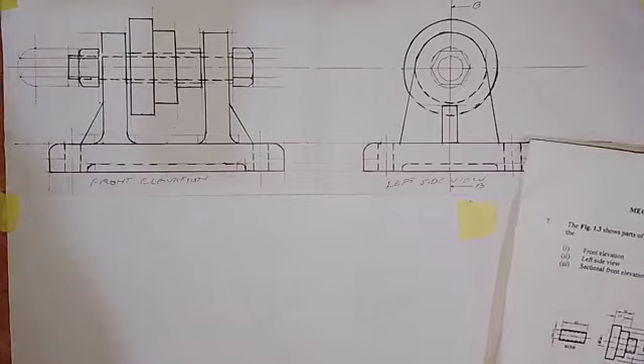Now we are going to continue working on this mechanical drawing, which is the 2026 NECO exam question. We have answered Roman figure 1, which asked us to draw the front elevation of the assembled parts, and we have also made the drawing of the left side view.

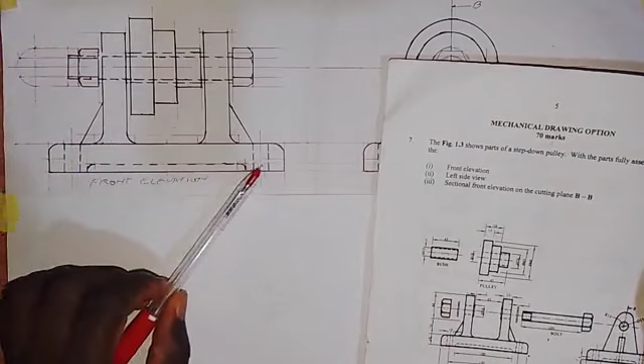Now we want to work on the sectional front elevation on cutting plane BB. I've placed the cutting plane as we can see it here on the end elevation. So when this part is cut into two, we remove this part and want to see what we have here. To draw the sectional front elevation, we replicate this, but in this case all the hidden parts will now be exposed. That is what we want to do right now.

Let's see how the construction can be made for the sectional front elevation as instructed. First we are to draw a horizontal center line. So here we have a horizontal center line like this.

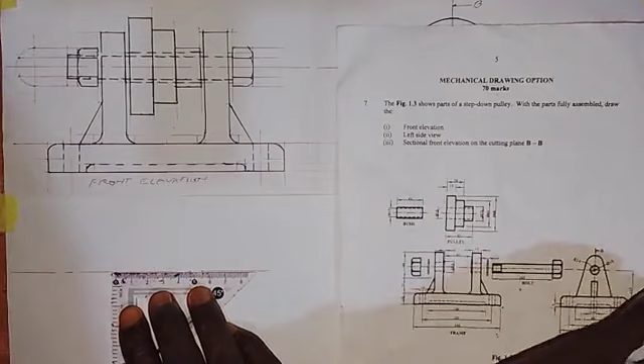Then we are going to start with the pulley. As we did for the pulley on the front elevation of the assembled part, we take the measurements. Total length is 45, but we add from here to here 15, from here to here 29, and then we have the balance here.

I will take the measurement. Normally I'm supposed to transfer from here, but I want us to have it taken accurately. So this is 15, then we have 29, and then we have 45. At each of these points we are to draw a vertical line.

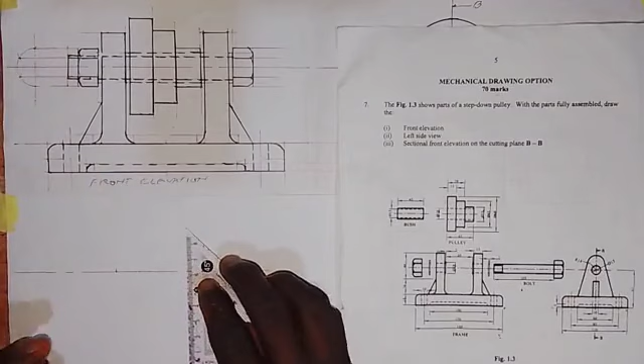Here we have a vertical line like this, and then here we also have a vertical line at this point. At this point we also have a vertical line, and then at this point we have a vertical line drawn here like this.

Let's take the diameter of each of them. Diameter of this is 60, this is 45, and this is 25. So 25 by 2 gives us 12.5, so here we have this to be 12.5 down and 12.5 millimeters up. Next one we have 45, so 45 by 2 gives us 22.5, down and up. The third one is 60 in diameter, so 30 millimeters down and 30 millimeters up, making 60.

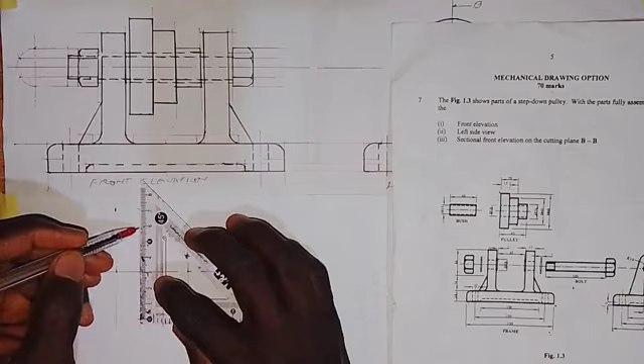At this point we are to draw a horizontal line. So here we have a horizontal line from here to here, and then coming up, we also have a horizontal line from here to here. Coming up, we have a horizontal line at this point, and then up here we have a horizontal line like this.

So then the next thing we are to do is insert this bush inside the pulley, because that will also be exposed by the time we cut it with the cutting plane.

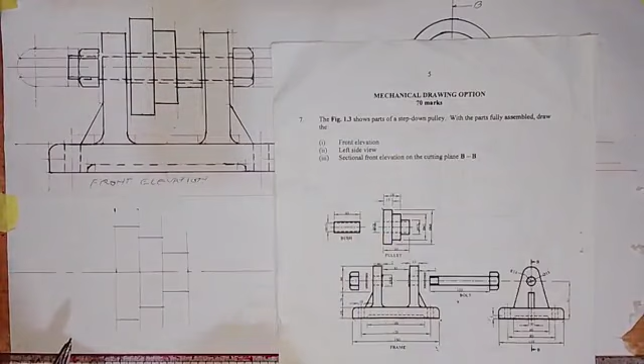So the diameter of the bush is 19 millimeters. 19 by 2 gives us 9.5 millimeters. So here we take 9.5 millimeters down, and up here we also have 9.5 millimeters up.

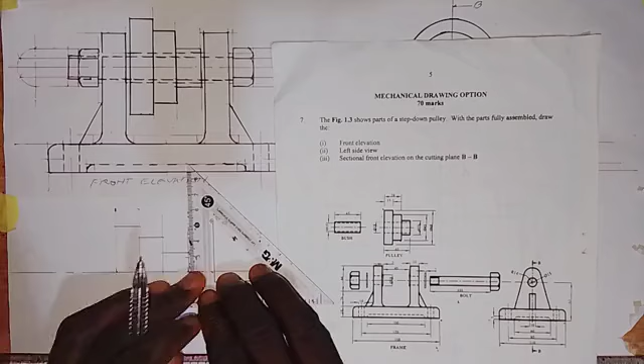Then we have a hole inside the bush with a diameter of 15 millimeters. 15 by 2 gives us 7.5 millimeters. So here this is 7.5 millimeters down, and up here this is 7.5 millimeters up.

This line will be seen clearly, so we are going to have it as a complete solid line. This also needs to be exposed; this is the thickness of the inner part of the bush, so we also need to make that line a thick solid line. Then coming up here, we also make this line a complete solid line.

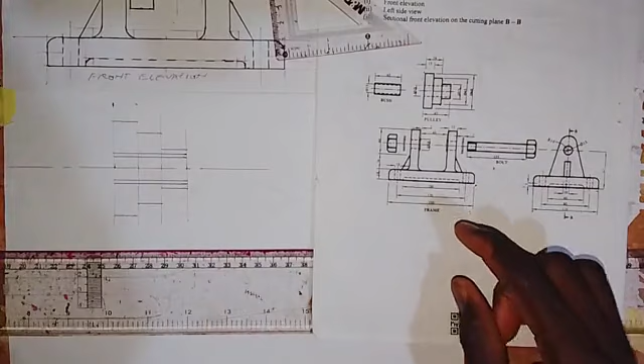All right, so now let's work on this part of the frame.

So we have a washer here, which will also be exposed on this face. It has the same diameter as the bush, which is 19 millimeters. Let's work on that, and the length from here to here, the thickness is 2 millimeters.

So let's work on that, we take the measurement directly and measure it. We take 2 millimeters, so this is 2 millimeters, and then on this side we also take 2 millimeters. Here is 2 millimeters here.

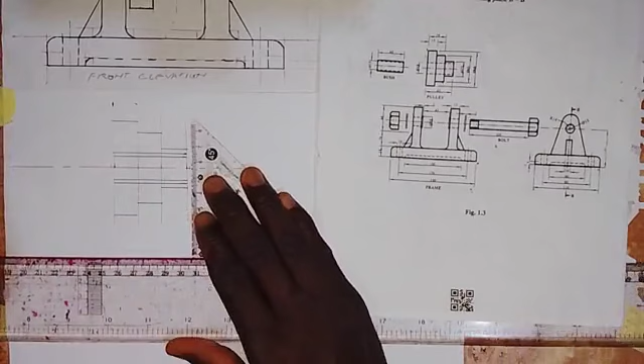So then we are to draw a vertical line at this point. Here we have a vertical line here like this. On this side also we have a vertical line here, like this.

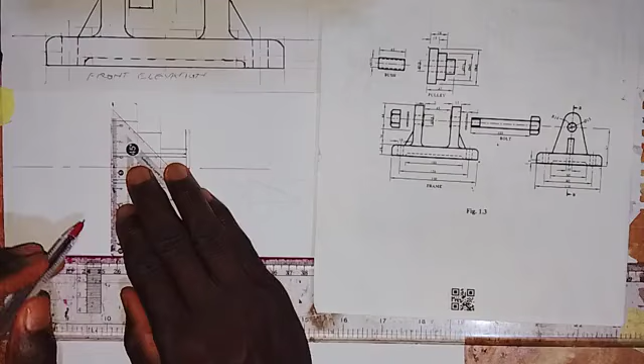So then that 19, we just transfer it here. So this is it. Then that 15, which is 7.5, we transfer it because that will also be exposed. We're supposed to do it on both sides, so we also draw from here to here, and then here we also draw.

So then coming up here, we'll do the same thing by extending this line to this side, and then up here we'll do the same thing, extend it here, and then extend it to this side. So we have this now.

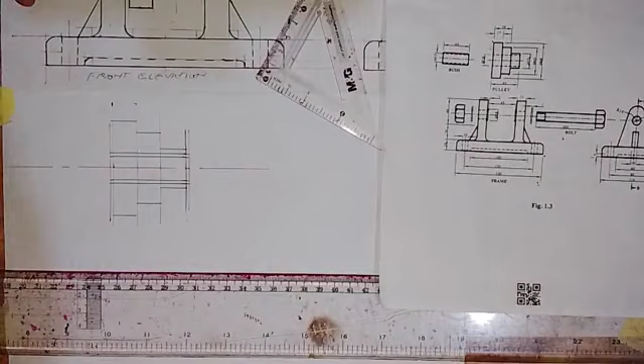All right, so having done this, the next thing we are to do is locate this upper part of the frame. So let's locate it here.

So from the center, it is 22 up, because total from here to here is 44. So that means from the center up is 22 millimeters. We take a measurement of 22 millimeters from here, so this is 22 millimeters up.

So we just have to extend it, we draw this line to the left side, and we draw to the right side from here.

So the thickness of this part of the frame from here to here is 15 millimeters. We take a measurement of 15 millimeters from here to this side, this is 15 millimeters on this side also. So from this line, we take 15 millimeters to the left side.

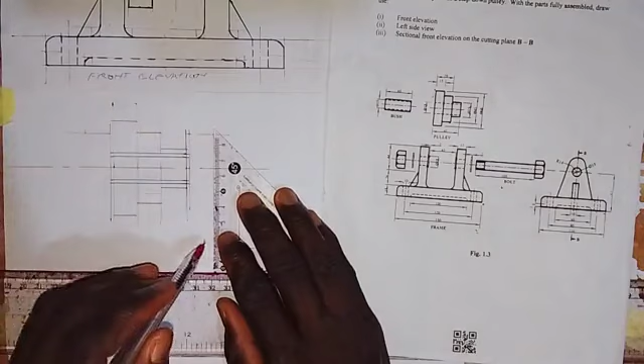This is 15 millimeters. So at this point we are to draw a vertical line here. So here we have a vertical line like this, and on this side also we draw a vertical line down here. So we have this.

All right, so then this hole that we have here on the pulley, with this washer that we have here on the frame, we also need to extend that. We are extending this one, the inner one alone is what we're extending. So we extend the inner one to this side like this, and then we extend this here, and we also extend this to this side.

So we have this. All right, so another thing we need to put here, we also have an external washer laid on this surface, and this part of the bolt will be laid here. So we also have the same thing here, the thickness is also 2 millimeters.

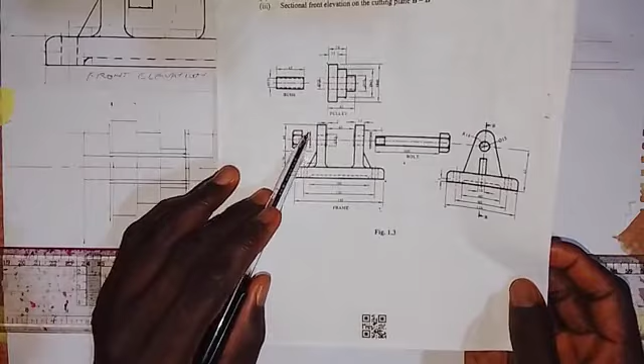So let's quickly do that at once. We take 2 millimeters outward from here, and then on this side we also take 2 millimeters outward. So this is 2 millimeters.

So at this point we are to draw a vertical line, like this. And then on this side also, we also draw a vertical line. Looking at this, the line is not straight.

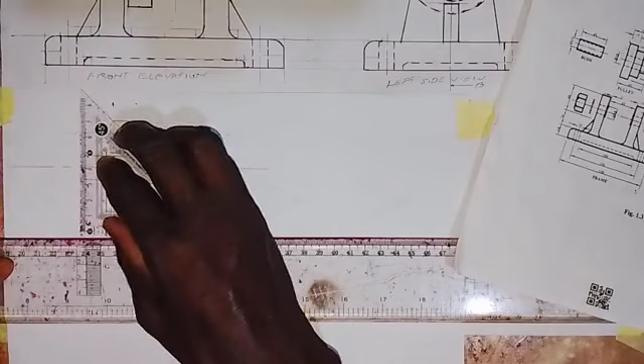Okay, so here we draw a vertical line. So we have this. This 15 will also go with this 15, so it will be extended into it. So we have it like this, and then we also have it on this side.

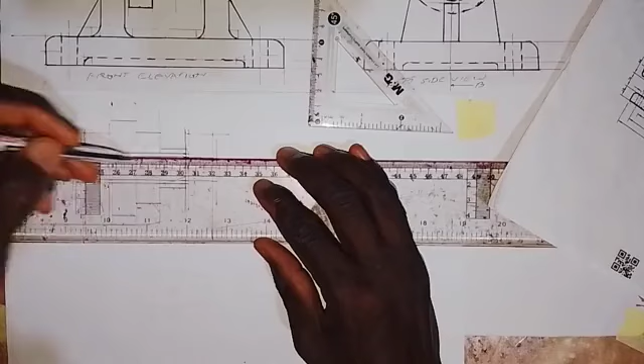So the hole, we also have it inside the washer. Then its thickness is 19 millimeters - that is the diameter on the external part. So that 19 millimeters, we draw it here, and then here, and up here also. We also draw it here and here. So this is it. We have laid the washers there.

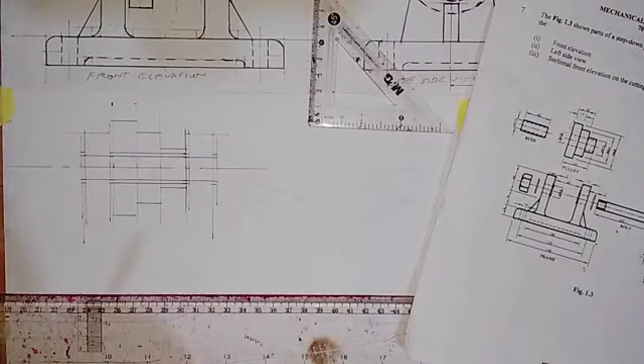So the next thing we are to do is bring in this bolt. This is going to be part of the length of the bolt bed. We need to place this part there. So this is what I'm going to do, as we did for the front elevation. So we need to come out here.

So we did the calculation on the front elevation - the calculation of the external diameter of this bolt. The diameter of the bolt, that is the cylindrical part, is 15 millimeters. We multiply it by 1.5, and that gave us 22.5, but we made it 24. We used 24 instead of 23, which is an approximate. If we are to bet, I will use 24 millimeters. So that is what we did.

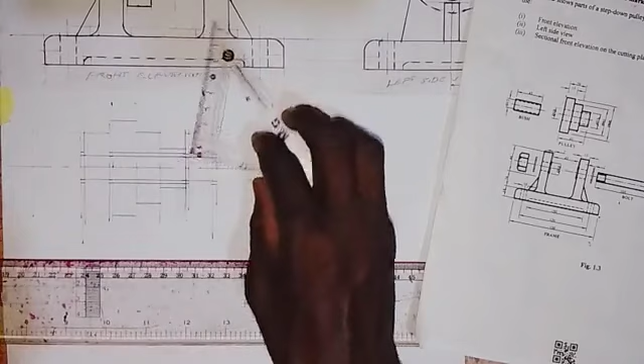So what we did is construct this nut - that's what we want to do, and this also has the same dimension. So we take 12 millimeters with the compass, having drawn this vertical center line. We put it here, and then turn it around to draw a semicircle, same as we did for the front elevation. So we draw a semicircle here.

Then we put the pin on the compass here, and make an arc. So make an arc here, and an arc here. So put it at this point here, and also make an arc here.

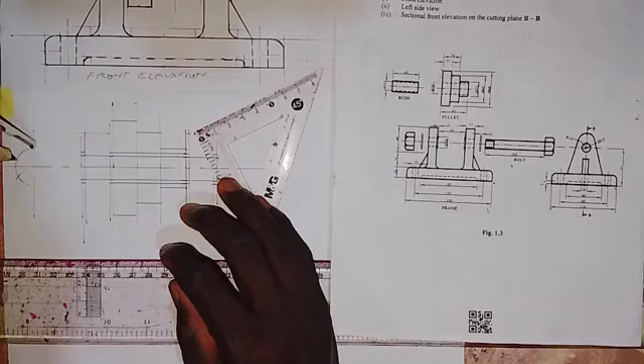So we have this. For this point, we come here, and at this point we draw a horizontal line from here to this side to touch this, then extend it for this part of the bolt. Then we come up a bit to this point and draw another horizontal line from here.

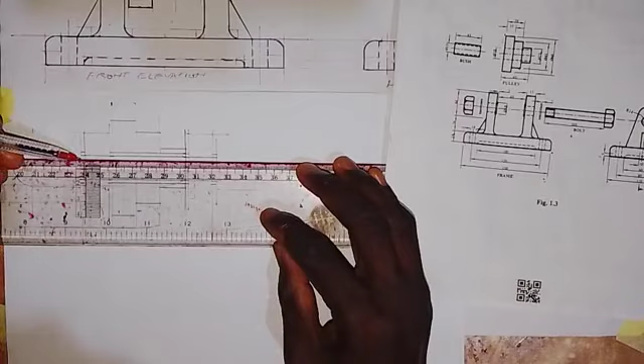We draw it here like this, and then coming up, making use of this point, we also draw this. Then coming up here at this point, we draw like this, and also draw here. So we have this. We did all this when we were making the front elevation.

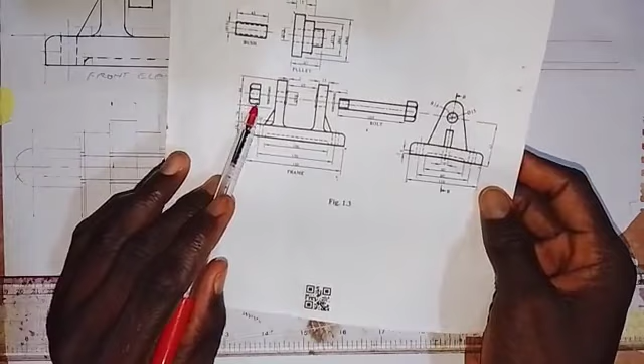So what we have to do next is the thickness of the nut from here to here. What you have to do is multiply that 15 millimeters by 0.8, which gives us approximately 12 millimeters. So then we take a measurement of 12 millimeters here - this is 12 millimeters.

Then here also, come to the front - we take 12 millimeters from this line, 12 millimeters forward. So this is 12 millimeters. At this point we are to draw a vertical line here, from here to here. Then coming here, we also draw a vertical line from here to here.

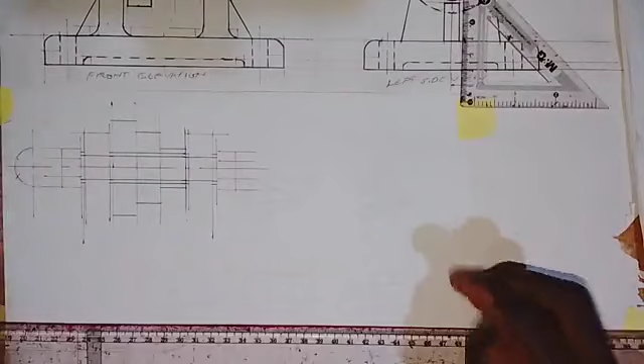So we have this. The next thing we have to do is this curve part, and then this straight line that we have here - it's drawn with the 30 degree of the set square.

So I'm not taking measurements for that, so I'll just use the 30 degree set square to draw this. And then coming to this side also, I will draw like this. Okay, so we have this. And then for this part, with the same 30 degree set square, we also draw from here to here. And then coming to this side, I'll also draw from here to here. So we have this.

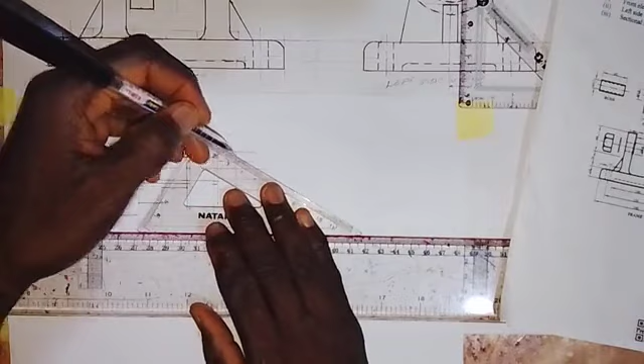So then the curve part that we have here, we have to do that. I used my hand to do that when we did one of the front elevations of the assembled part. So I'll make a curve like this, and here also I'll make a curve like this. You can use your French curve to do this, no problem, just go on and do it. And then this curve parts. So we join this together like this.

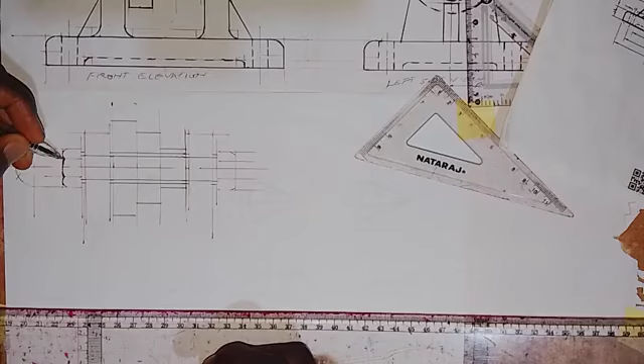All right, so we have this. So then on this side we do the same thing, by making the curve, and then so we go on. All right, so we have this.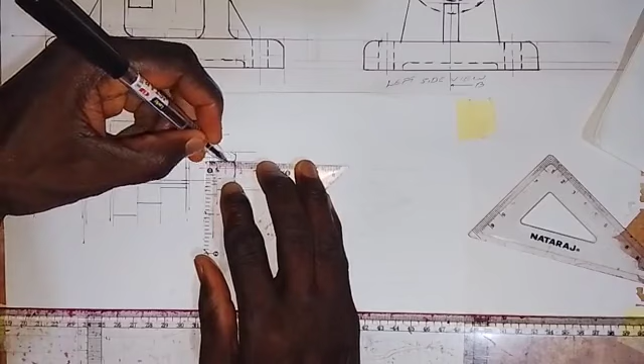Okay, so what we have to do now, we have to make this a thick line from here to here, make this line a thick line from here to here, and this line make it a thick line from here to here. So make this a thick line from here to here, and then this line should be made a thick line from here to here.

So then this part, just make it a thick line. And then so we come here, we'll do the same thing. Make this line a thick line from here to here, and then we may also make this a thick line from here to here. So then these lines, make them thick lines. All right, so we have this now.

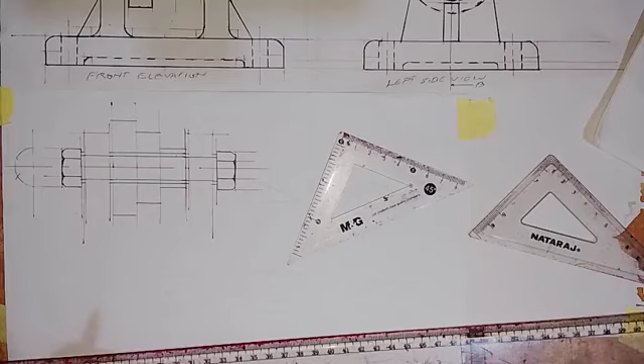Okay, so then we go on. So for the bolt, it has an extension outside, because the total length from here to here is 103. So 103 millimeters.

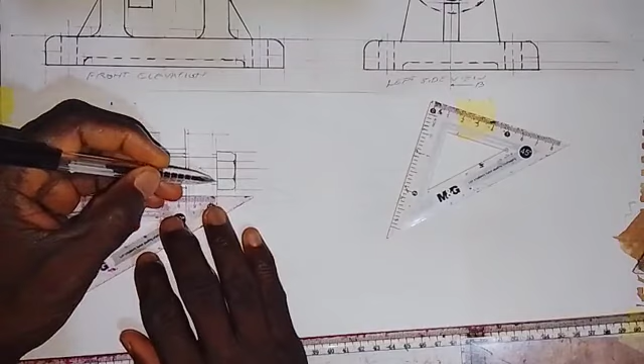So 103 millimeters, so we measure from this point here. So this is where we are measuring from this point. So we measure from here, 103 millimeters. So this is 103 millimeters here. So I've marked it there.

So what we are to do now is that, this is the thickness, so that's 15 millimeters. So we extend it outside here. So I need to draw, let's draw a vertical line at this point, just a faint vertical line like this. Okay, so we have this.

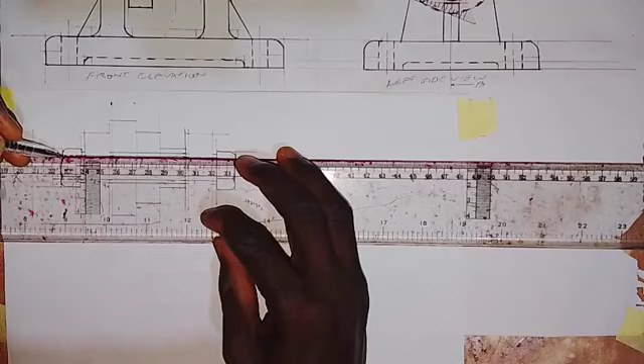So we extend it outside here. So in the nut, it should be with short dashes line, but here we draw it from here to here. Okay, so coming up here also, in the nut, we draw a short dashes line, and then it extends here like this. And then we just come up a bit, like 1 millimeter up. So draw this line, and then we also come up here, drawing from here to here.

So all right, then we have to complete the... all right, so we have this. Okay, so that's for the bolt parts. So what we have to do now is that, let's complete this part at once.

So this will be made thick from here to here, and this will also be made thick, and then from here to here this will be made a thick line, and then the same thing here. And for this, we also have the same thing from here to here, and then we also make it a thick line from here to, so we have this.

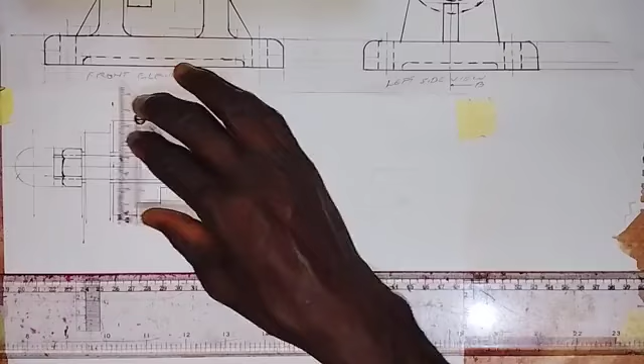Okay, so all right, this line made a thick line from here to here, and then we also have this to be a thick line from here to here. All right, so on this side we also have the same thing, make it a thick line, and then we also make this a thick line from here to here, so we have this.

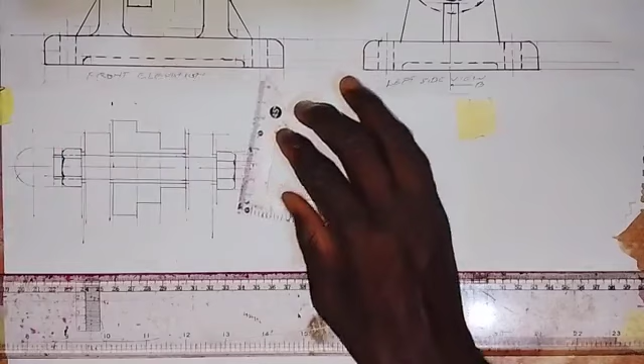All right, so now let's come and work on the down part. So let's come and work on the down part. Okay, so for the down part, let's work on that. Okay, I believe we're able to cover that.

All right, so on the down part here, we want to work on this part of the frame. So what I'll just do is transfer from what we have up here.

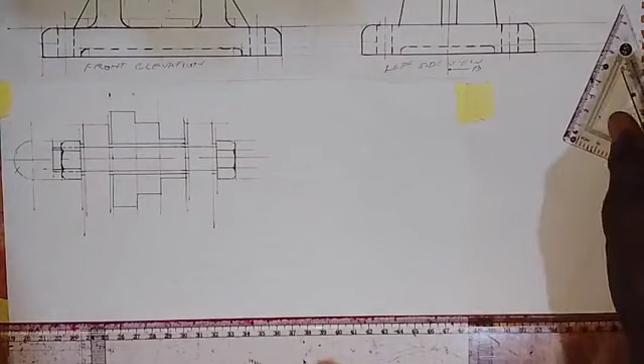All right, so we have what we have to take the measurements. So from this center down to this bottom part, we have 22 from here to here plus 26, that will give us 48, and then we have 18 down.

So let's take that 48 millimeters first, from the center line. So this is 48 millimeters. At this point we draw a horizontal line like this.

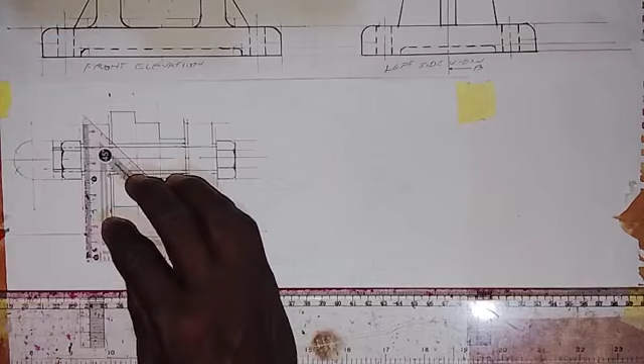So then we are to take a measurement of 18 millimeters, that is from here to here. So take 18 millimeters down. So here is 18 millimeters.

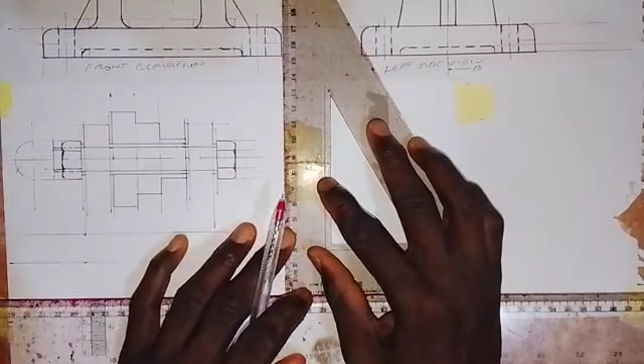So at this point I will also draw a horizontal line, so here we have horizontal line like this. And then so I will now transfer this line to this end, so I transfer it here. So we have this.

So this hole that we have here, it will be shown to be exposed, so I just transfer it. So I draw the center line here like this, that's the center line. Then coming here, I will transfer this. So we have this now.

So then on this side, I will also transfer this distance that we have for this part. So coming to this side, we do the same thing, transfer this, and then I'll transfer this whole part. Draw a line from here to here. So the center here, I will also draw it as a thin long chain line, as a center line.

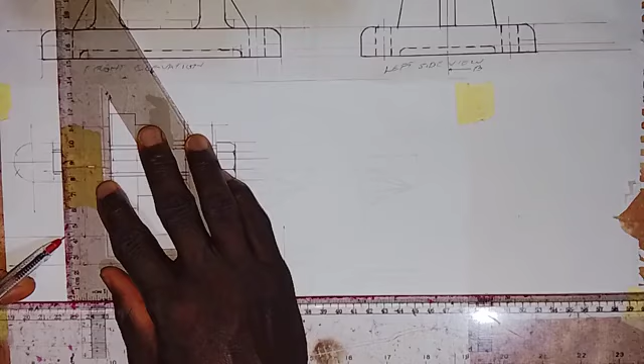And then so I will also transfer this part, and then coming to this end I will also transfer this. All right, so that is done. Okay, so other things that we are to do here, I'm looking at this part of the frame.

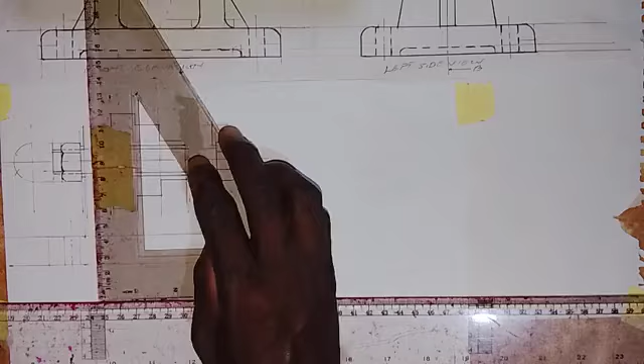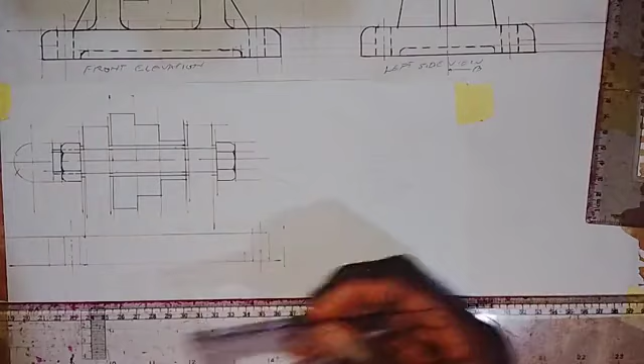Okay, this distance that I took here is not aligned, so we are not going to use this, because the centers are not in line. The way I placed them, they are not in line together, so sorry for that. I need to take the distances separately, I need to work that out. They are not in line, I didn't take note of that.

Okay, so what we are to do here, bring this line down. Sorry for that please, I need to bring this line down here. Okay, so from here we have to be 50, so we divide this 50 by 2, that's 25. That's how we did it in the front elevation.

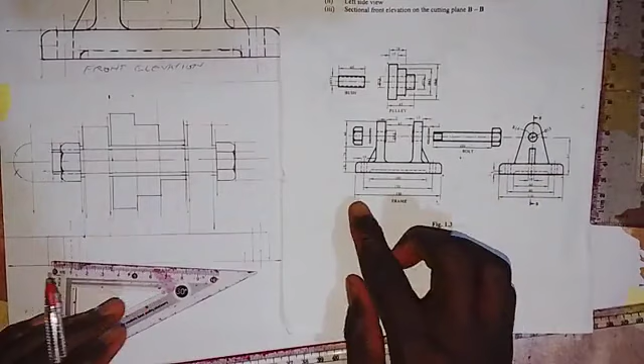So for this 25 that we have here, I'm transferring it down, and from what we have here, the total length from here to here is 150. So we take 75 millimeters to the left side, 75 millimeters to the left side. So here is 75 millimeters, and on this side we also have 75 millimeters from here. Sorry for that error that I didn't take note of.

All right, so draw a vertical line here like this. And on this side also we draw a vertical line. All right, so we have this.

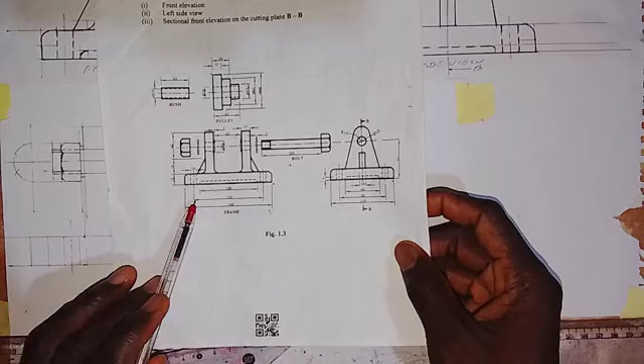Okay, so another thing we need to do here, for this part that we have, the distance from here to here is 120 from the center of the hole. Let's locate, from the center of the hole, so what we have to do from here is take 60 millimeters to the left side to locate the center of the hole, and then take 60 millimeters to the right side to locate the center of the hole. So this is 60 millimeters.

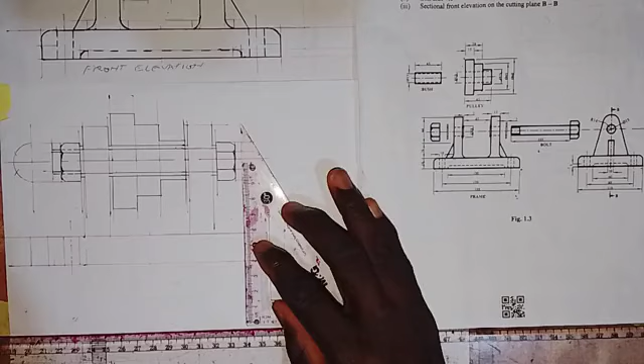So at this point we draw a vertical center line here for the hole, so vertical center line for the hole here.

Okay, so at this point we also do the same thing, a vertical center line for the hole. So for the hole, we have it to be 10 millimeters in diameter, so we take 5 millimeters to the left side and 5 millimeters to the right side.

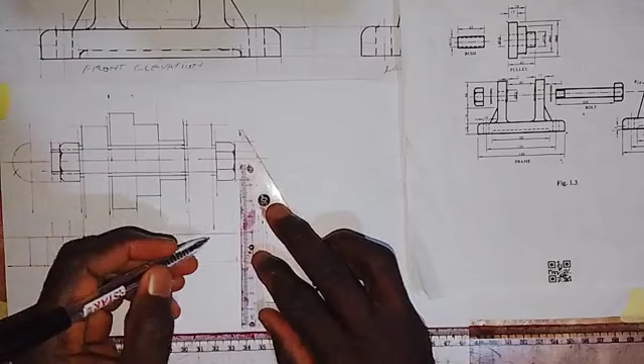At this point the hole will be exposed, so we are going to see it clearly. So we make this line a thick line, and also make this other line visible as a thick line. Coming to this side, we do the same thing, and here too. So that is for the hole that we have there.

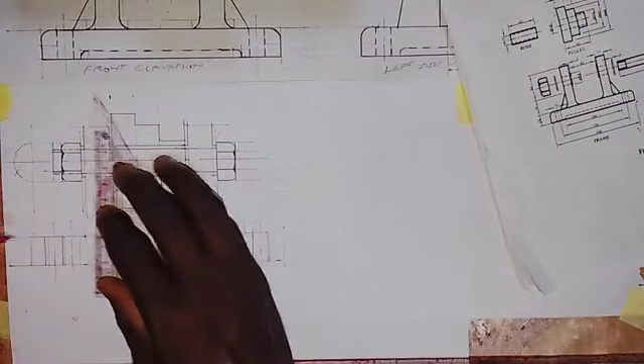So the next thing we need to do is bring this line down. Then let's work on this web. Its distance from this line is 26 millimeters up, so let's take that 26 millimeters here. If you look at the way it is drawn, we just connect this together with a straight line, and we take 26 millimeters up from here also. So we connect these two points together. All right, so that is the way it's put here.

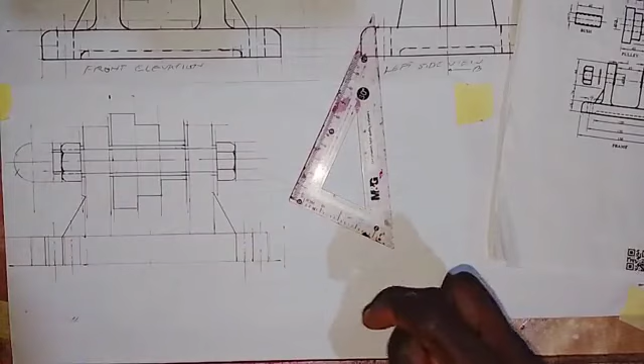So another thing we have to do, we have some curves here. As we did in the front elevation, we take 5 millimeters up, and here we also take 5 millimeters up. Then we have to take 5 millimeters on the horizontal as well, 5 to this side and 5 to this side, and here too we take 5 millimeters to this side.

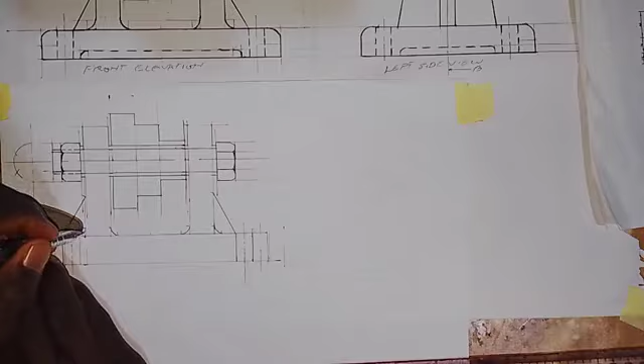So with the French curve, we form the curves. We use the French curve to form the curve here, like this, so the curve will still be there. And then on this side, we also form the curve here.

So the next thing we have to do is make this a thick line from here to here, and from here up it forms a thick line, from here down too. Here also we have this to be a thick line from here to this point, and this will be a thick line from here to here, like this.

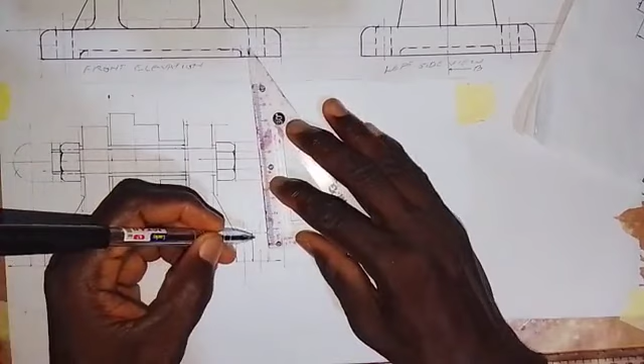Other things we have to do: we also have a curve around here, this curve that we have up here and here, so let's work on that. What we have to do, I took 10 down here, and then we take 10 down here. So with the French curve, we form the curve here, and form the curve here. On this side, we also do the same thing.

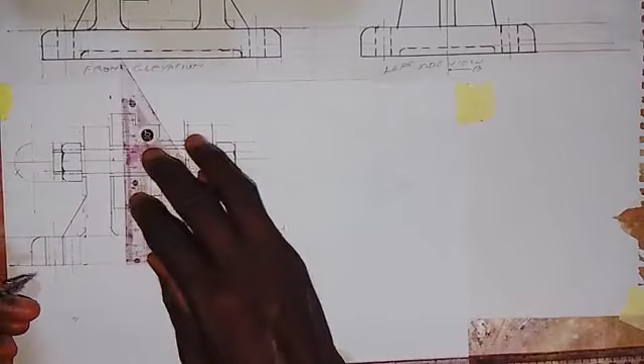So we have this. Then the one that we have here, we take 5 millimeters. Let's look at the midpoint: the length from here to here is 100, so we take 50 millimeters to both sides. From this point, here is 50 millimeters to this point, and here also 50 millimeters. So we draw a short vertical line here, and a short vertical line there.

So from this point, we take 5 millimeters up, 5 millimeters up, and we draw a horizontal line from here to here. Then we have to form the curve, so I used my hand to form the curve here, and then also form the curve here.

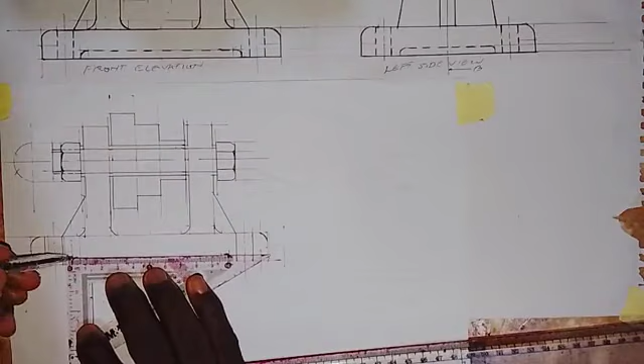Okay, so we have this. Then we have to make this a thick line all through to this end to be exposed. Then, so then we make this a thick line from here to here, and this a thick line from here to here. So unlike what we have here on the front elevation, the line will just be a thick line from here to here.

And okay, so then this will be a thick line from here to this end. So this we left empty like that, and then we also make this a thick line. This will also be a thick line from here to here. All right, so that's what we have, and this line also be a thick line from here to here.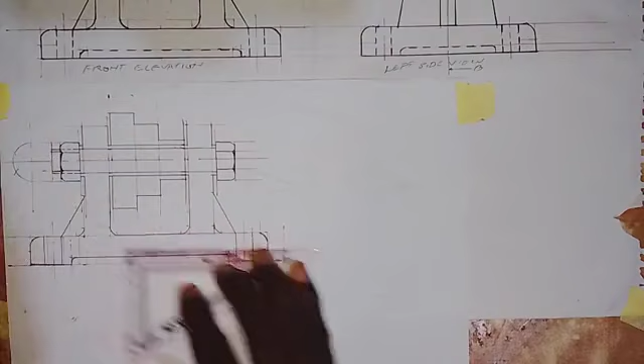So this will be left like this, unlike what we have here in the front elevation. So and then this line also from here. You also need to make this a thick line, and this will be a thick line from here to here. All right, so this is what we are going to have here.

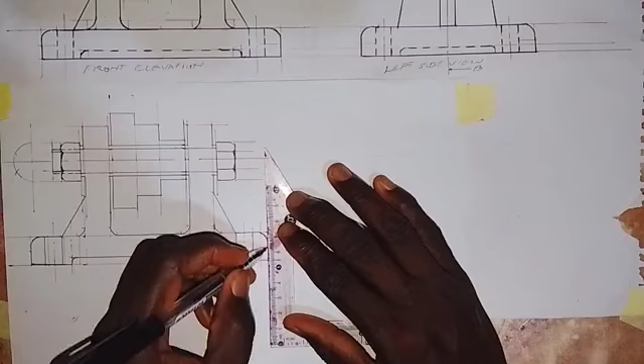Okay, so we have this. So what we are left with now is for us to hash the solid part. Okay, so let's look at how the hatching lines or where the hatching lines should be put. So that's what we want to do now. So we make use of a 45 degree set square for hatching of the surface.

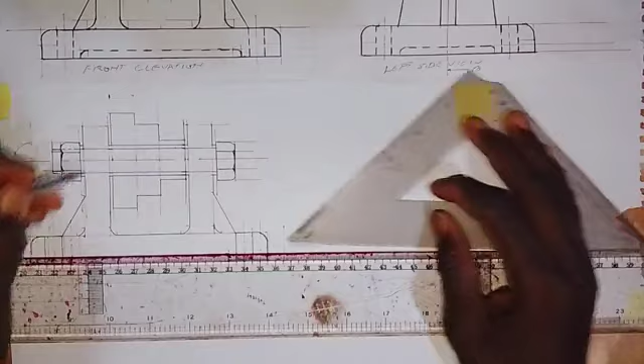Okay, so let's start by hashing the pulley. We have two parts here: the part of the bush that we inserted into the pulley, and then we also have the pulley itself. But let's hatch the pulley. They have to be hatched in different directions. So I'm hatching the pulley like this.

So this is the pulley. I'm hatching the pulley alone, just the pulley alone. Okay, so the hatching has to be done properly, so we don't have to rush it.

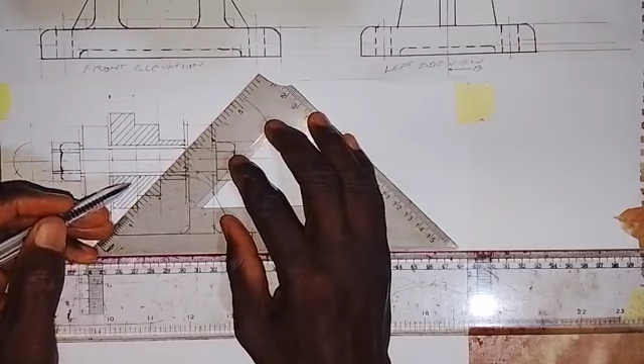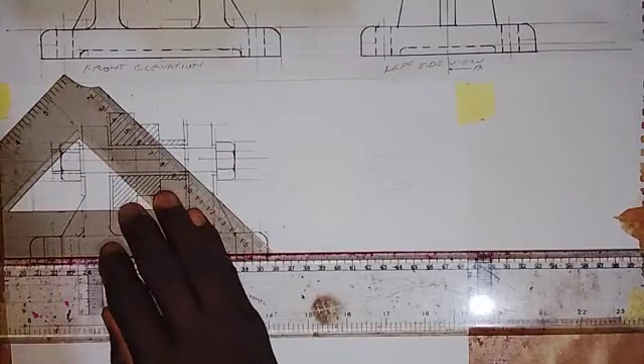All right, so we have hashed the pulley. Then the bush that we have inside it here, let's start. So we hash in another direction. It has to be hashed in a different direction.

Okay, and then we can make it more wider than that of the pulley. So when we have two different parts like this, the parts are to be hashed in different directions. If one enters into the other, they are laid on one another, so they have to be hashed in a different direction. So that's what we are doing here.

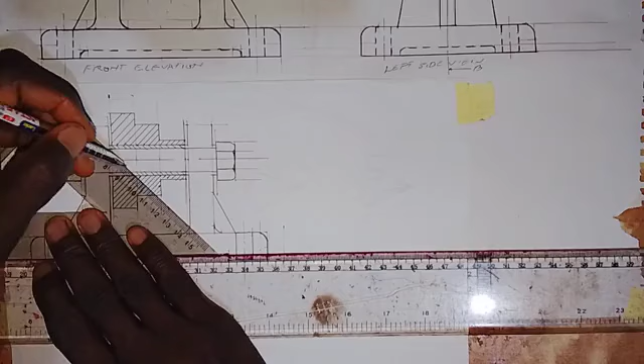All right, okay, so the bush has been hashed as we can see it here. So what we are left with is to hash the frame. So the frame also, we also need to hash it. We decide on how to hash it. So I want to hash it in different directions, making it more wider. So we have this.

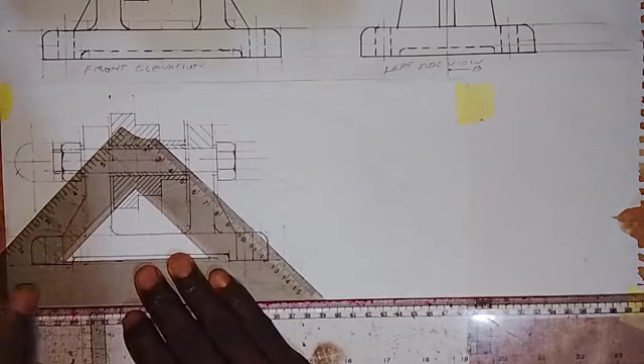All right, so we have this. Okay, so we are not hashing the web, so the web will be left unhashed. We don't hash a web when it is cut in this form, so we leave it unhashed. So we are not hashing the web. Okay, so we have this.

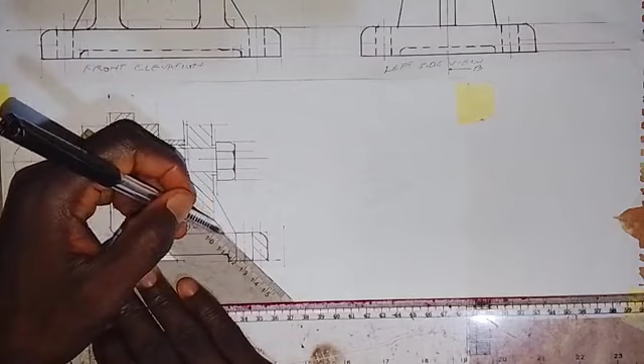Okay, so we have it. So usually use a 45 degree set square in hatching. I think I should have done this. So we come here and here, and then.

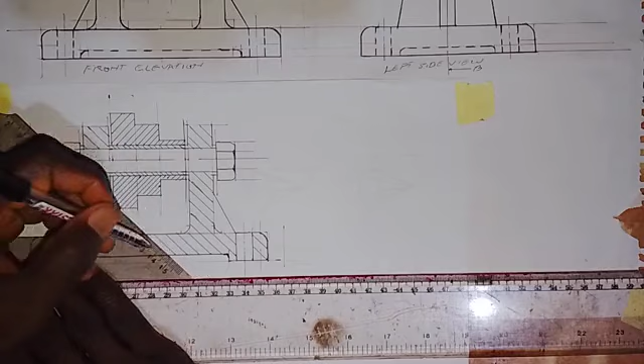All right, so we go on. All right, so we go on with this. So we are getting to the final stage.

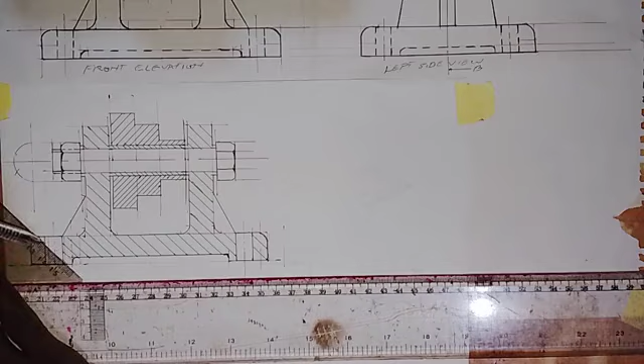Okay, all right, so here we go. So this is the sectional view, and then there's another part that we need to hatch, that is the washer. Okay, so sorry, the washer will be left unhatched, so it will not be cut into two, we have to leave it like that.

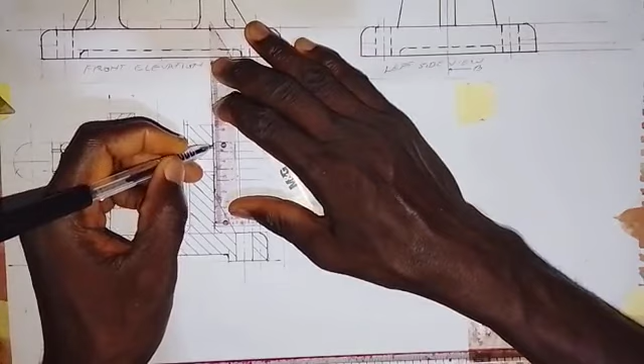So this washer now, I need to make this a thick line. It should not be cut off, so from here to here, make the thick line, and then for this one also make the thick line from here to here, so it should not be cut into two. But this one here is very small, so let's just leave it like that. I mean, the one we have in here, okay, we have already done it together with the bush that we have inside there. So here we have the sectional front elevation on plane BB.

So you have to write it here, you have to write it here, so you write at the end, write sectional, sectional, sectional front elevation, so write BB, like this.

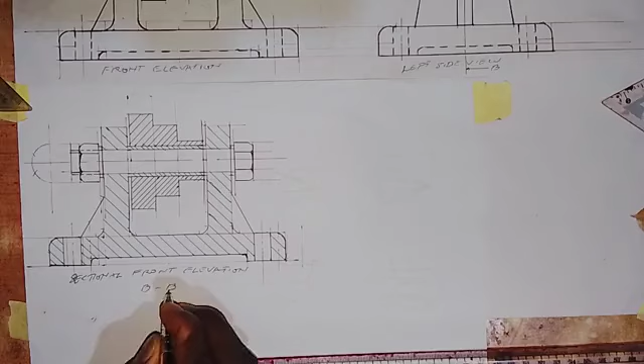Okay, all right, so this is it. So as simple as I've done it here. So thank you and God bless you.